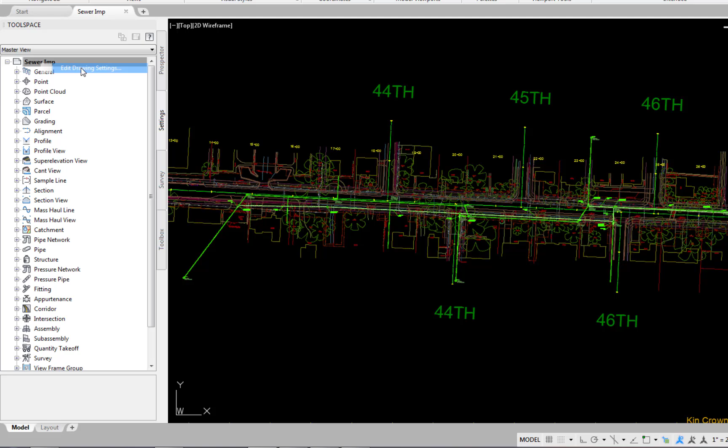Construct sewer service default settings: right-click drawing name, edit drawing settings, object layers, pipe, pick current, C-Sewer-Service, okay. Pipe network section, pick current, C-Sewer-Service, okay. Pipe or structure profile: C-Sewer-Service parts are not drawn in profile, leave as default. Structure, C-Sewer-Manhole, okay.

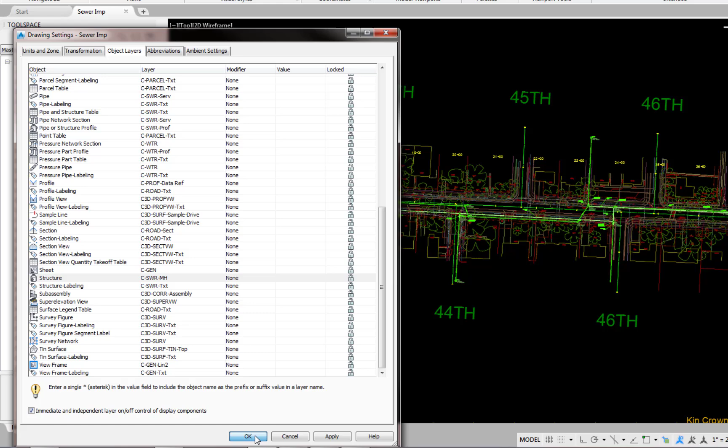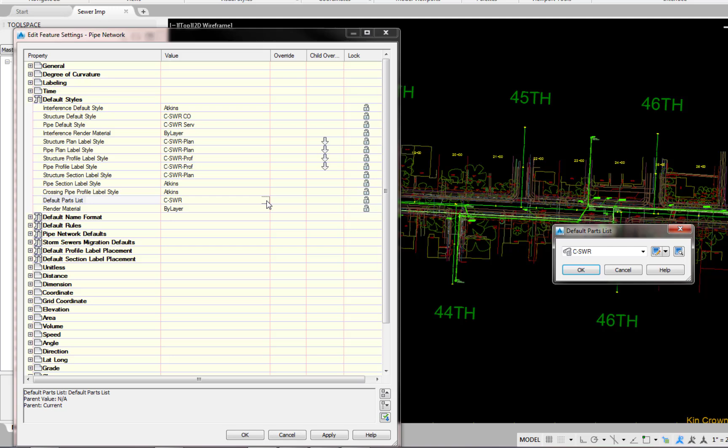Okay. Right-click pipe network, edit feature settings, default styles, structure default style, C-Sewer-Cleanout, okay. Pipe default style, C-Sewer-Service, okay. Default parts list, C-Sewer-Service, okay.

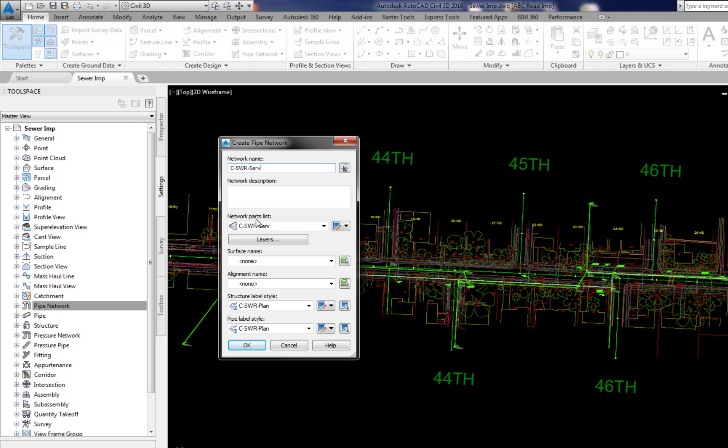Okay. Create C-Sewer-Service pipe network: home ribbon, create design panel, pipe network icon, pipe network creation tools, network name, C-Sewer-Service, network parts list, C-Sewer-Service, layers, C-Sewer-Service, C-Sewer-Manhole for the structure, not drawn in profile, pipe network section, C-Sewer-Service, okay.

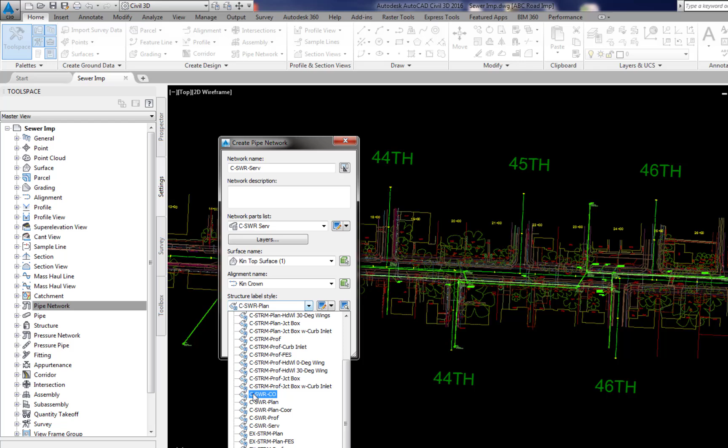Surface name, KIN top surface, alignment name, KIN crown, structure label style, C-Sewer-Cleanout, pipe label style, C-Sewer-Service, okay. In pipe network layout tools, check that the name is correct, C-Sewer-Service, parts list, surface, alignment, 4-inch cleanout

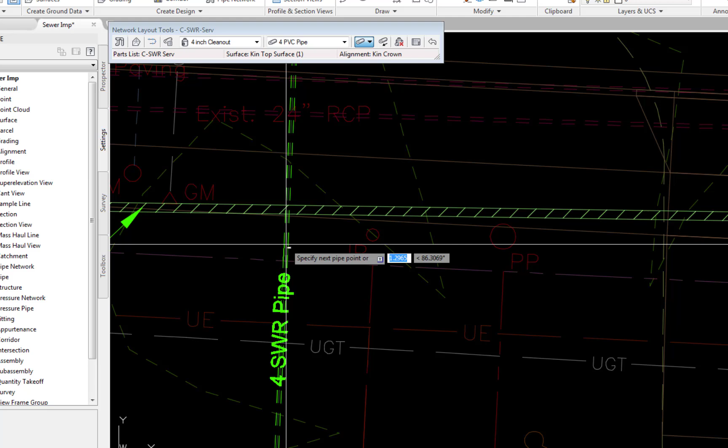for the structure, 4-inch PVC pipe, slope direction downhill, pipes only, snap off, pick the intersection of the existing sewer service lateral at the property line, snap on, pick perpendicular to the construct sewer, escape. In the events panorama, clear all actions, close panorama. The events panorama occurs because the C sewer service cannot connect to the C sewer pipe.

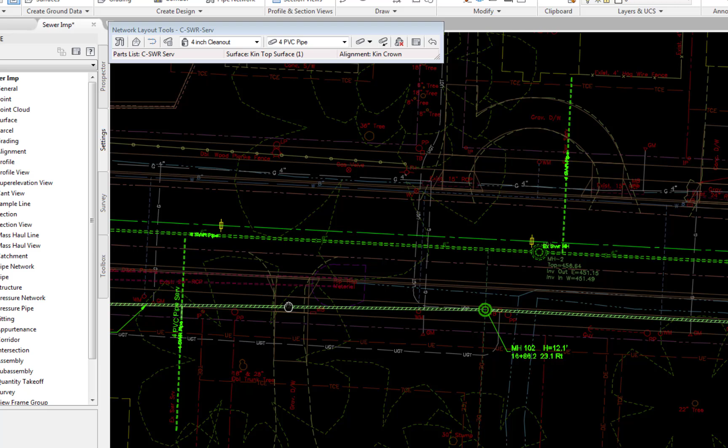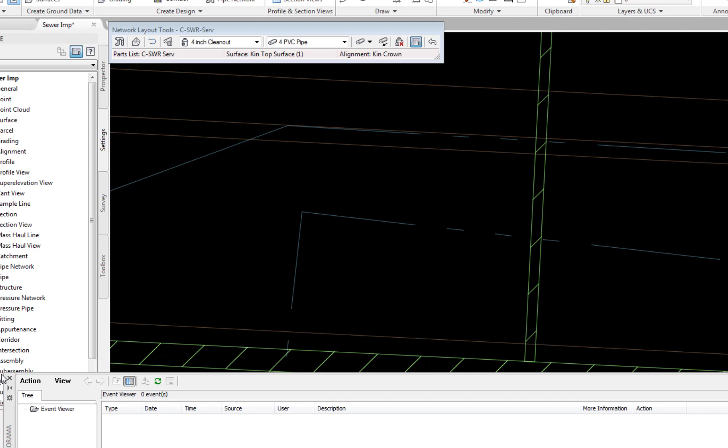Repeat for other locations. Pipes only, pick the sewer lateral at property line. Pick perpendicular to the new sewer main. Escape, clear events, close panorama. Repeat at other locations. A double sweep T cleanout is installed at the property line. The service line is maintained by the city from the cleanout to the main and by the property owner from the cleanout to the building.

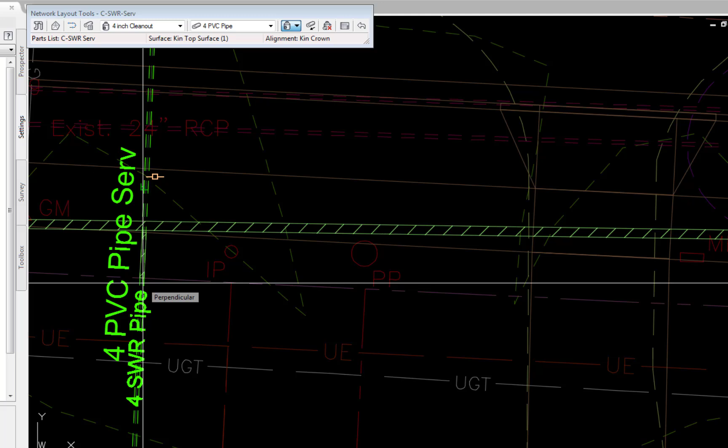Add the 4-inch cleanout. Select structures only. Hover over pipe at the property line, snap off, and pick when connect glyph appears. Escape. The cleanout is shown with label. Repeat at all other locations. Modify and move pipe labels as needed.

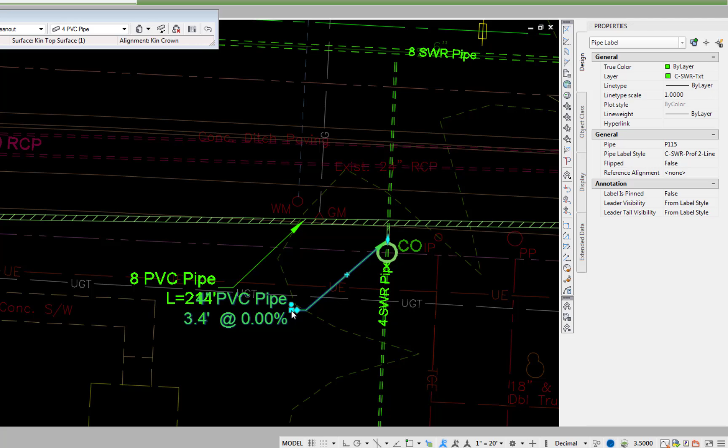For short lengths of pipe, pick label. In Properties palette, pick label style. Select C-SWR-Serv 2-Line. Move label away from pipe, pick the square glyph. Move to desired location. Move other labels as needed. Repeat at other locations.